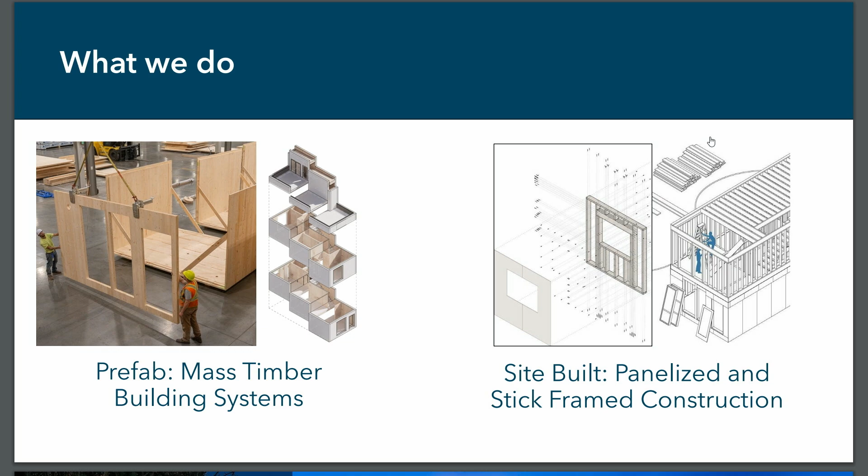We build, like I just said, any way possible. The bulk of our history is in stick frame, on-site construction, but we are doing more and more with either panelized construction or our own building system, which is in mass timber, where we're doing prefabricated mass timber structures. And we know it has to fit your pro forma.

So as we head down towards deep sustainability, carbon negative, net zero, as much as we can get into the pro forma, we know that the more that we systematize and the more that we create prefabrication, the more we're going to be able to do that every single time. When we work with clients, we really work on making sure that the costs are controlled while we hit those sustainability goals.

And here's the fun part and why we're here: mass timber. Does everyone know what mass timber is? Who doesn't? Maybe if you don't know what mass timber is, I can start from the top. Okay, great. You know what? Other people are with you, but everyone's shy. So mass timber is a structural building material.

It is an incredible structural material. It has got a lot of extra rigidity and structural properties. It can be precision engineered and can be cut with a CNC machine. So we're getting tolerances and prefabrication that you don't get in wood.

And if anyone's ever tried to take a 2x material and turn it into some kind of system, you realize really quickly that a 1/4 inch isn't enough tolerance, that there's all this wonk and wobble in every one of those sticks. So how we're really using this in housing is about getting to that precision performance. I'm gonna let other folks talk about larger buildings.

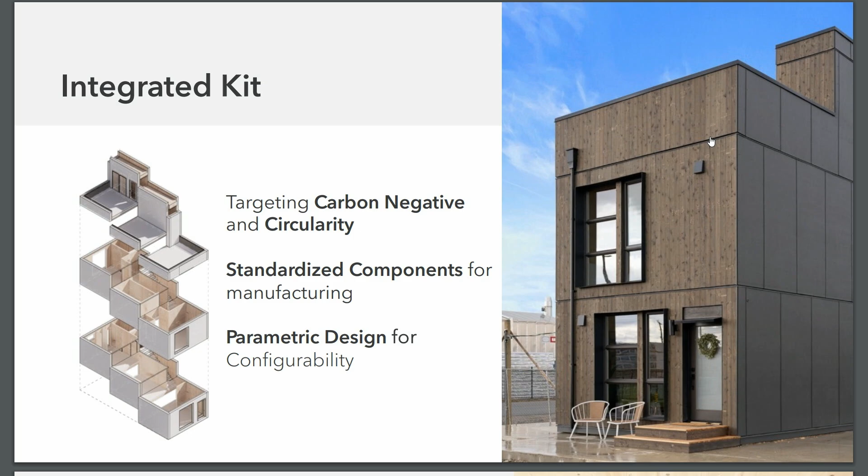Our flagship product was a utility wall, and it still is, and we put it in our integrated kit buildings. You know, we built a lot of houses, and we could go through all the daily logs and tell you that most of the time, something that cost us extra money and rework or time later was in the mechanical, electrical, plumbing zone, and especially rework. The number of times someone drilled through a water line installing a cabinet.

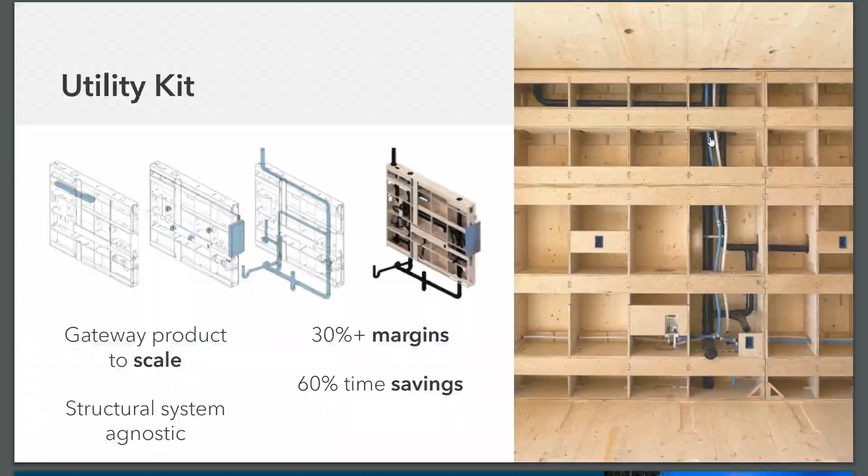And we're not special. My friend just bought a house. It just happened to her. She's like, I can't believe someone drilled through a water line. And I was like, you wouldn't believe how common that is. It's so common. But we can protect for that with systems. We can also save a lot of time on install, optimize for performance, really trying to hack that labor problem on site.

This is kind of fun. There's no prompt ahead of me, so I have to look. I built these slides this morning.

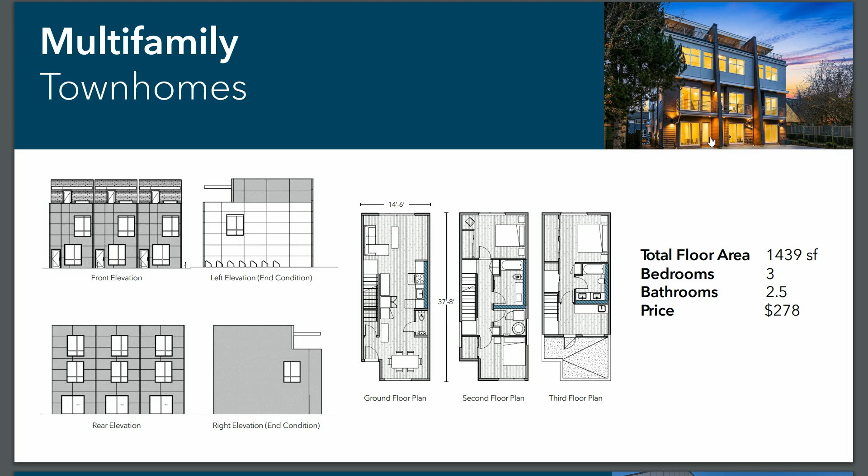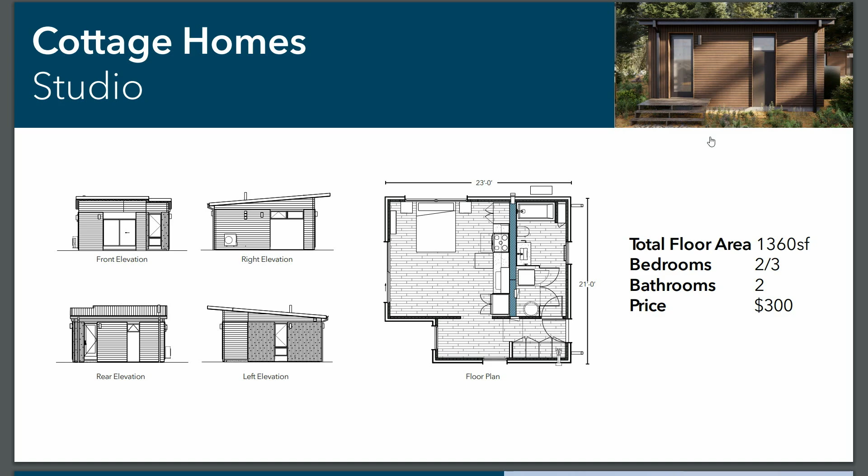So today we're selling our building system kits. These are projects we have examples of on the ground. We've got townhomes, we've got cottages, both two-story units heading to Portland and one-story units heading to Bainbridge Island, Washington, and we're working on an apartment building. So all of these are based on the same component parts, so we can really start to leverage that system.

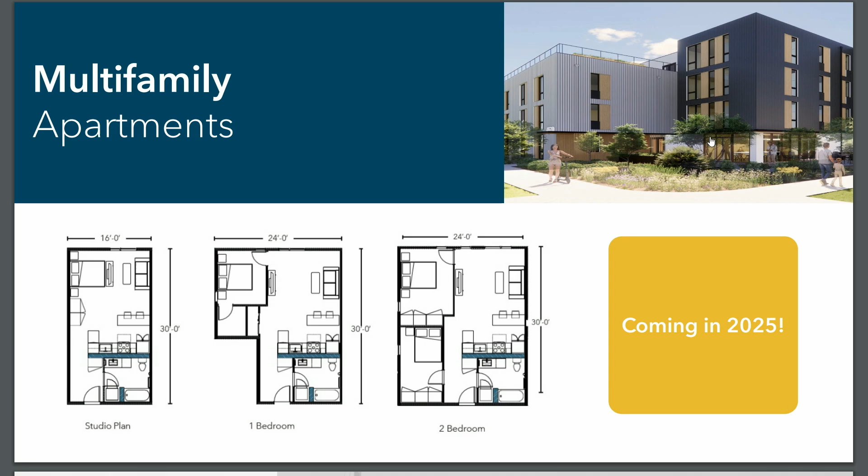So we do prefabrication because it's faster. You guys doing a time check on me? Probably someone should, huh? Okay, cool. So moderate yourselves, we can do it.

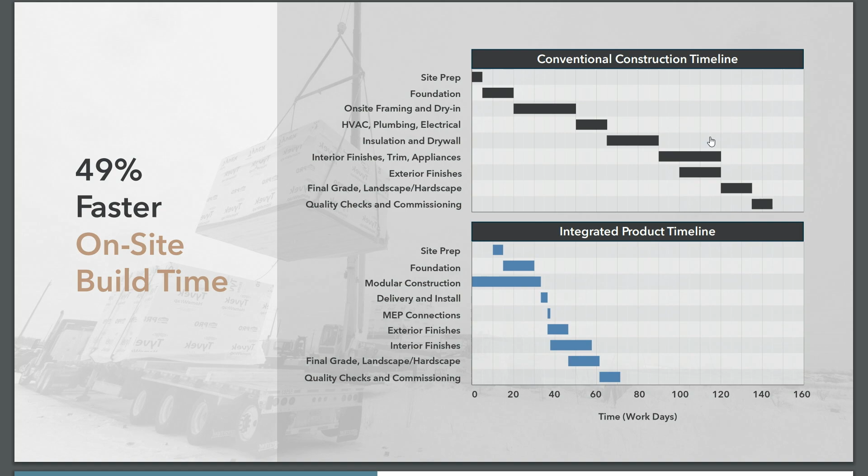We do it because it's faster. Even in these low numbers of prefabrication that we're doing now, 9 here, 7 there, we know we're saving 50% time, and we're not even fully optimized for it. And time, of course, is getting people indoors faster. It's also how fast we get to revenue, whether it's rental revenue or sales revenue, which can really help pro formas out.

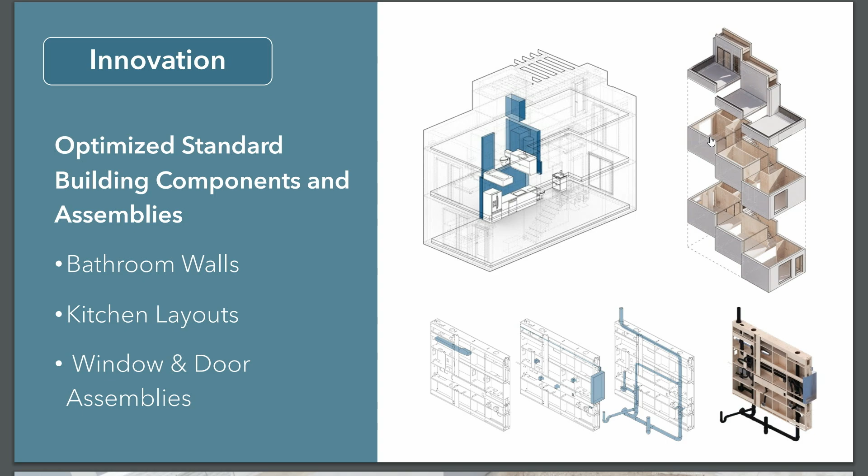All these units are optimized for layout. This is where the rubber meets the road. Everyone's like, this is such a great idea. What do you mean my bathroom needs to be over there? Every single, like, architects, love you, every single time. We have to optimize for the repeatability and then work around the edges where the design can be flexible. And this is how we get to optimized layouts.

3 more slides here. One is we've got DOE grants for advanced research projects, working with other partnerships, trying to get to carbon negative and circular home. So that means not just the building embodied energy and the operational performance is carbon negative, but then those parts and pieces can be used a really long time later. What is the structural value of mass timber in 100 years or even longer? That is an awesome project funded by the Department of Energy.

The second phase of it we're working on now, and we're hoping to get to dispersed delivery systems for off-site manufacturing. Kind of a crazy idea, but how do you go more lightweight while we get units on site? So you can kind of follow us along. That'll be 2025 for us, and we'll let you know how it goes.

And we're not alone in this, but the U.S. Forest Service is really helpful with wood innovation grants and trying to get wood products to be more and more used, especially wood products that can replace steel and concrete, not only for its carbon benefit, but for the national interest of using forests. And we love those wood innovation grants to help us along the way.

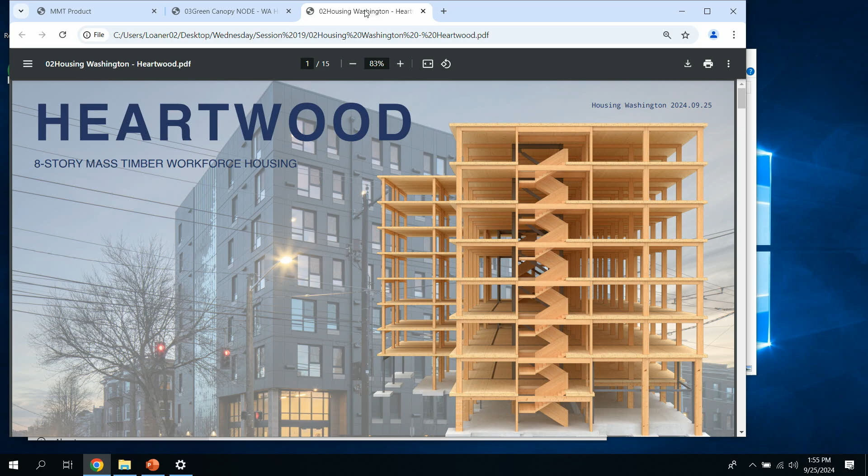All right, I'm also going to make a good effort to try and keep this on time because some of you may have heard about this project before. We've been telling everyone about it at every chance we get. So I'll try not to

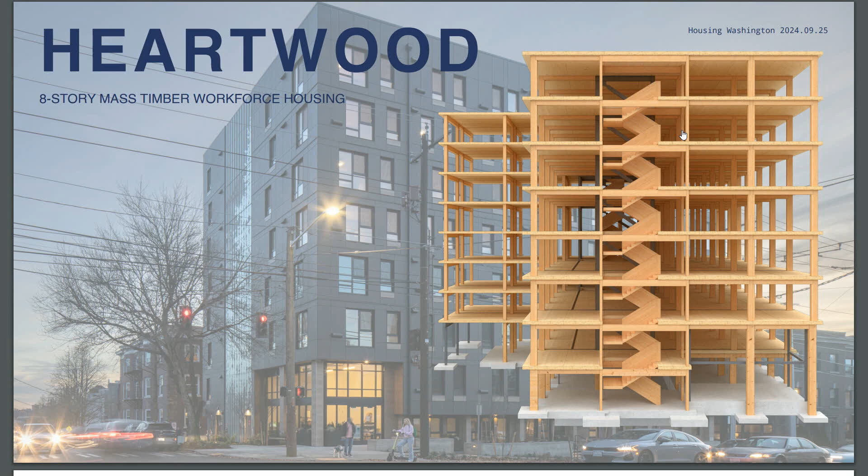repeat too much information. But for those of you that don't know, Heartwood is a workforce housing project in Seattle, right on the boundary of Capitol Hill and Central District. It targets that sort of missing middle income, 60 to 100% AMI. So it's not traditional affordable housing, but also very importantly, it is 8 stories of mass timber, and it is the first as of right permitted in this new Type 4C building code, which I'll explain a little bit more.

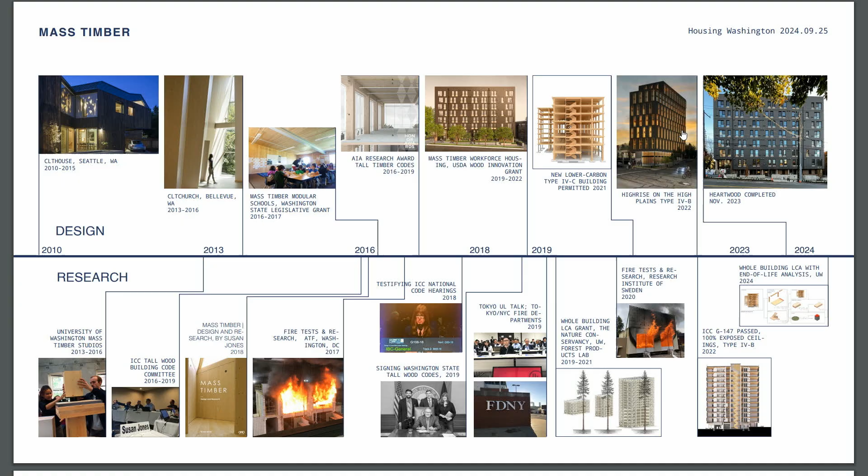Some background on Atelier Jones. I think I didn't do my actual introduction part. I'm Megan Doring. I'm an architect with Atelier Jones. We're based in Seattle, Washington, and we've been involved with mass timber since its earliest stages in the US. So that started with building one of the first CLT houses in the US in 2015, getting involved in the International Code Council's Tall Wood Building Committee to rewrite those codes so that in 2021 we could make tall timber a possibility, and then working further through more fire tests to revise those codes for 2024 to make it even easier and expose more timber in those buildings.

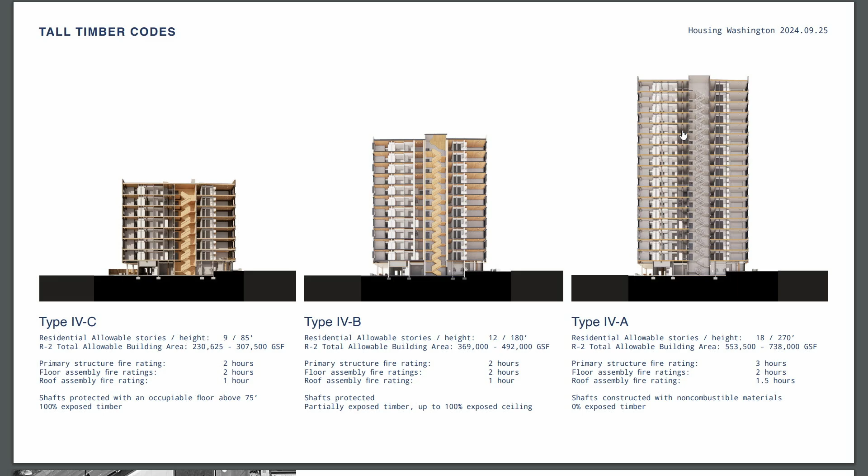So just a high-level summary of what these codes are. We created 3 new building types. Type 4 used to be the heavy timber area, so now that's Type 4 HT, and then we have these 3 new types, which are Type 4C, 4B, and 4A. C being the 9-story, that's your least restrictive. You can expose all your timber, you can look at all of it. Type 4B is that sweet spot in the middle, that 12-story model, where you have to cover up just a little bit of your timber. And then Type 4A, which is up to 18 stories, but you have to cover all your timber with gypsum wallboard.

So how does this apply to Heartwood? So Heartwood is located, like I said, at that boundary of the Capitol Hill and the Central District. It's on a shared site with the existing Helen V apartments, which are an affordable building that's owned and operated by Community Roots Housing, which is a long-standing nonprofit in the Capitol Hill area that you guys might be familiar with.

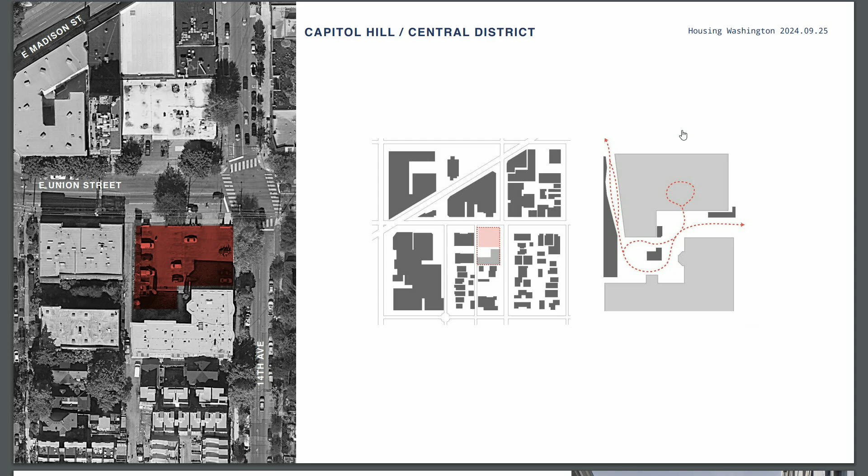And the challenge with this site was building on a site with an already active building that people are living in. We have power lines, we have a sidewalk that has to remain open, and that's a point accessed building, which means we have to keep all of the entrances accessible at all times. And we had, of course, trees and all of those other things. With urban infill, there's all of these difficulties, and we had no laydown area on this site. And that's really what made mass timber an interest to this project, that we could do that just in time delivery and get everything straight from the truck into erection.

So just some background on the building. There was always a focus on this building on balancing and working together with efficiency to get as many housing units in this project as possible, but also it needed to create a community with this existing building. This would end up being a mixed income community between this already affordable building and this new sort of missing middle income workforce housing project.

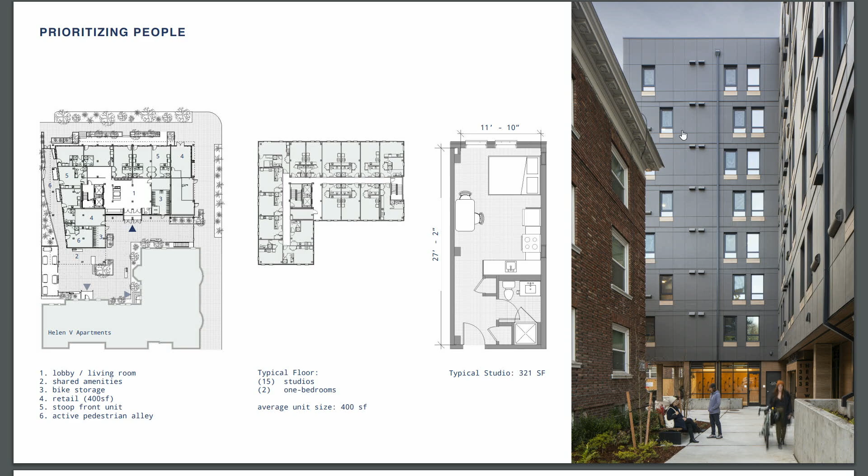So we did that by keeping those upper floors really, really simple and really repeatable. These are studio and 1-bedroom units, so they're very efficient pricing-wise to build. We all know that that's what normally makes projects pencil. But we focused all of our design efforts on that ground floor. So we're carving back spaces to create those shared entries, shared amenities that are serving both buildings, both populations, and this was input from those existing residents that helped shape these spaces. So we're being very intentional with where we're putting our design and where we're being very, very efficient.

But to give you a little backup and explain how this project came to be, Heartwood project received a Wood Innovation Grant in 2019 to support the pre-development phase and the feasibility studies for this project. And what really made it work and made mass timber interesting for this project was the fact that we were able to get those additional 3 stories above what we could otherwise build and up to the maximum allowable in the zoning because we went with mass timber.

There were some sensitive soils on this site, so we couldn't really go in the ground. We needed to keep a really lightweight, shallow foundation, and mass timber allowed us to get that density and that additional height without disturbing those soils. So this is a slab-on-grade foundation with a little bit of mat under the elevators, but otherwise it's very minimal concrete.

And I can give you some high-level summaries on the capital stack for this project. This was not my area of expertise. This was AP Hurd with Skipstone that really did all the wizardry on this. So this is not a publicly funded project, so there's no LIHTC here. It received a conventional loan with 2021 interest rates and had a little bit of private equity, but otherwise is traditionally funded.

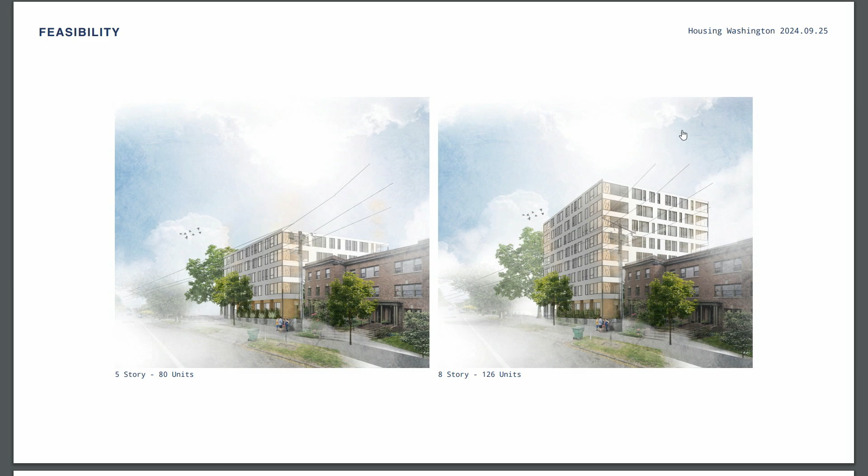But the mass timber itself was smooth and on schedule, and that install went at about a floor every week and a half, and that's including the seismic core that went up at the same time. But working with mass timber, we have to consider certain things in feasibility that you otherwise wouldn't. So you're front-loading some of your design effort.

And an example of that was in this project, we had to study in detail the reflected ceiling plans of the units when we were still in pre-development because of some of the quirks of the tall timber code. Concealed spaces add a lot of cost because you have to treat them a little more specially and line them with non-combustible material. So we considered where we routed every single service and material at the pre-development stage and really figured out where things were going.

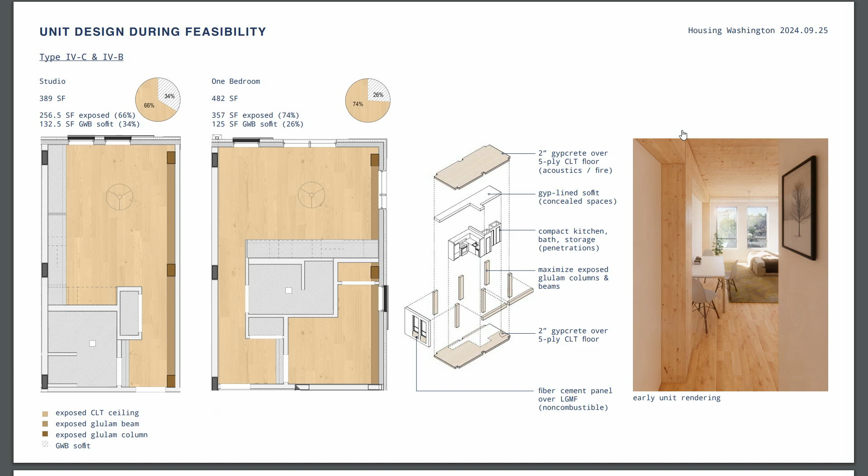And a lot of this comes with when you're establishing this novel new system, you have to front load some of that effort. And prefabrication is certainly a part of that. You're thinking about things earlier on. But this new system is based around this all wood joint. So your structure for these Type 4C buildings needs to be 2-hour rated, and this is a 2-hour rated joint that's all wood with no steel connectors. There's a few screws in there, but you're not doing steel hangers or anything like that.

So that saved us a lot of cost in the steel package. I think it came to like $5 a square foot or something like that, a significant cost in the steel package while maintaining that 2-hour connection, and this is approved by the City of Seattle and works for the Type 4B and the Type 4C buildings.

But the system that this is based off of, this post and beam sort of column loaded system as opposed to a bearing wall, means that we have really flexible grids. We can go from 12 feet to 18 feet really easily, and that means we can adapt to the site really easily. So Heartwood has grids that sort of look like they're all over the place, but it's just so we could squeeze in as many units as possible.

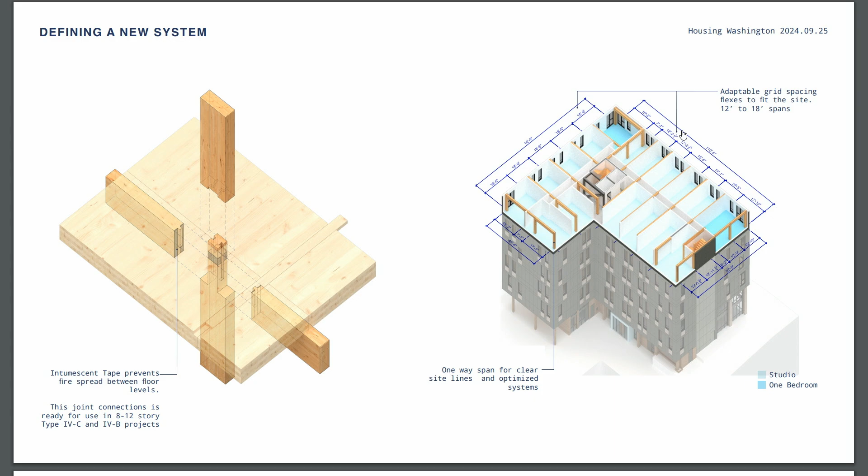But it also means that in the future, none of those walls are bearing. You can take them all down. This can become 3-bedroom condos. It can become whatever it needs to be 100 years from now, because the facade can come off. That's not load bearing either. So the long-term adaptability is thought into this building from the very start.

But for all of that long-term adaptability, we also had to think about a lot of things earlier on when we were trying to get these dense units in here. So we talked to a lot of our consultants and got our entire team on board really early in the process. In the early stages, we were talking obviously to structural, but also fire protection engineers and acoustic engineers, about a lot of these small things that needed to have the code language interpreted through the City of Seattle. So we're not asking for any exceptions, but we needed a lot of things defined for the first time.

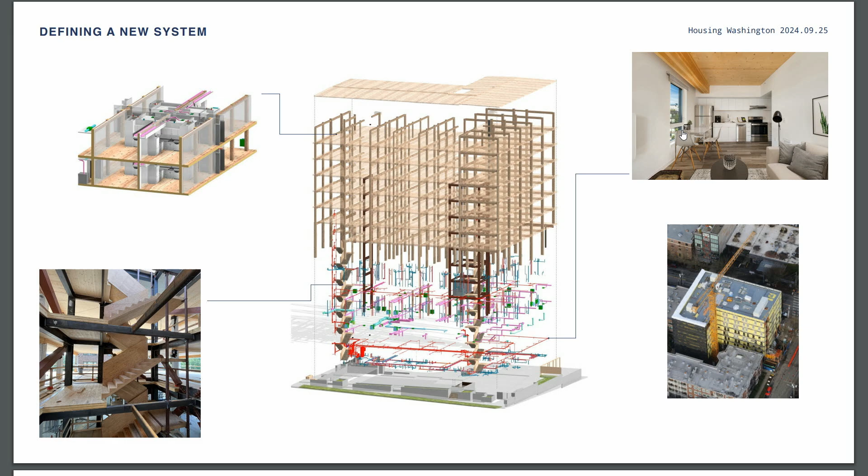That's not to say you don't still want to get those engineers involved early in any mass timber project, because you're prefabricating. We're cutting every hole larger than 4 inches in the factory, so we need to know where every single pipe is going. But that early design and early feedback from our consultants meant we were able to expose more timber in some of these secondary spaces. Our corridors are completely exposed except for a sprinkler line, because we were able to tuck away our services in other areas. We were able to get exposed timber on our egress stairs.

Those are not special feature stairs; those are the regular exit stairs. And using that mass plywood panel meant those stairs went up at the same time and pace as the rest of the building. We didn't need secondary construction access stairs. They helped in so many ways, and they also help the overall effect of the building without adding extra cost. So we're getting all of this warmth and exposed timber just with the efficiency of the structure and the basics of the building.

But with exposing all of that timber, we have to be really cognizant about where we're getting it from. Atelier Jones has always focused on the Cascadia wood basket, where we know our forestry laws are very strong. We trust them. We have relationships with our suppliers. We know the forest they're pulling their wood from because they know it, and we've visited a lot of them. It has the secondary benefit of reducing our transportation cost and transportation carbon as well. You can see everything for this building was sourced within about 500 miles of Seattle.

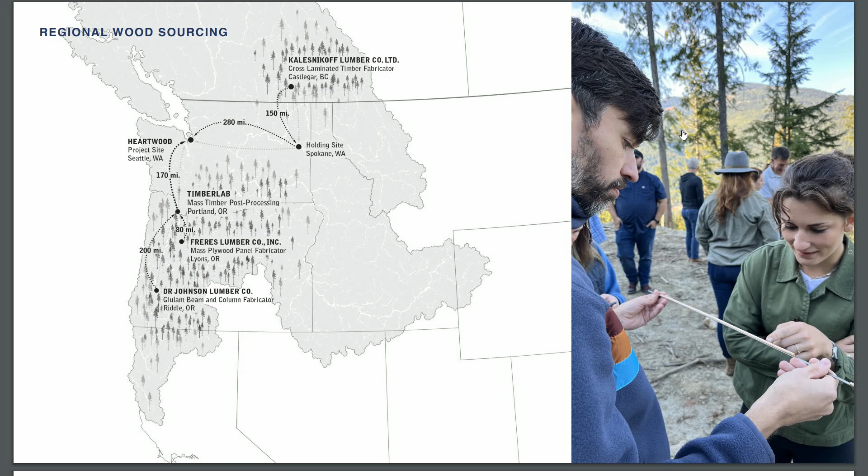But how does that work into the carbon? We completed a life cycle analysis with the University of Washington, where we compared Heartwood to an equivalent 8-story concrete building. That's where we found, and can now confidently say, that the structure of this building is net negative. There's more carbon stored in that timber than is expended to create the concrete and the steel, to transport it to site, and to put it up.

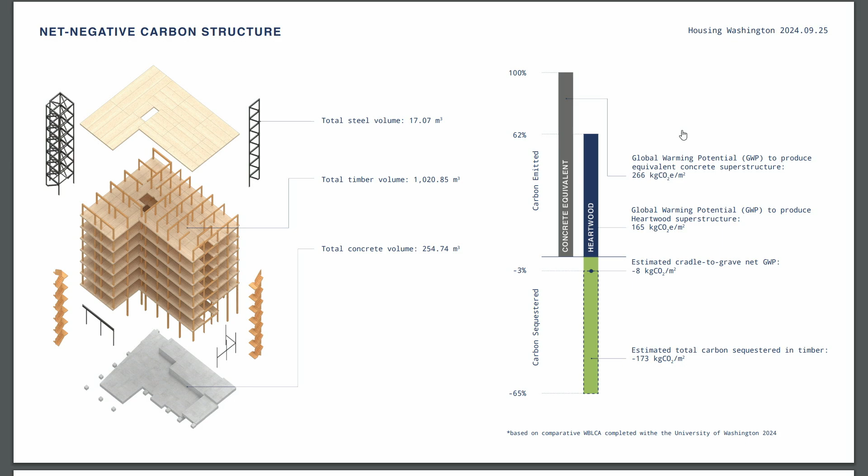But we also took that even further and studied the end of life of this building. If you were to take this building down and reuse the parts to build another building, some of it becomes OSB and particle board, through several cycles of rebuilding, recycling, and creating new products. Even after all of it ends up in a landfill 300 years from now, 88% of that carbon remains stored forever. So we can say we're capturing all of that, and it's helping the overall net negative carbon footprint. We don't have to worry that it's all eventually being released back.

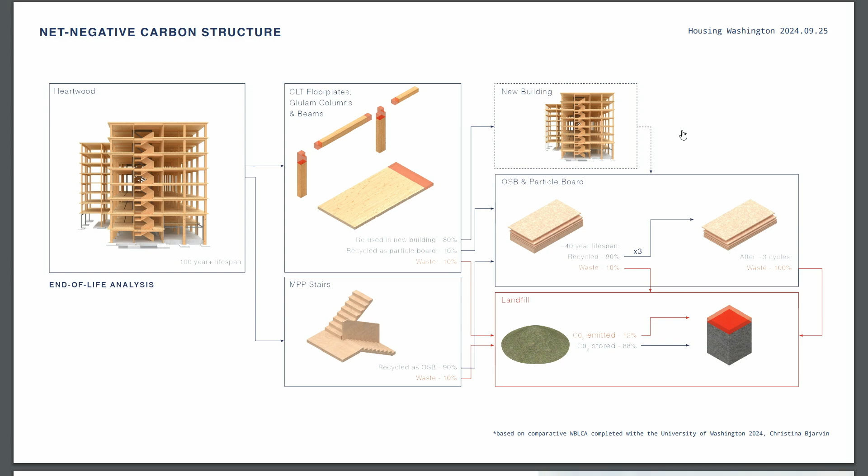And through more recent research, we can also say these are probably conservative assumptions. You're probably getting a longer lifespan than 100 years, and we're probably reusing more of that timber than we assumed in this study. I think we assumed 10% waste every time you reuse that product, and our recent research shows we're getting nearly all of it into reuse because of the way we're doing our joint connections. There aren't steel kerf plates or things we have to take out. It's an all-wood connection, so you can use more of that wood.

So where is this going in the long term? We're currently working on replication, on doing this again at scale. We all know our housing crisis is a scale problem. We need big solutions, for our carbon and climate change issues as well as our housing. So we're working on finding those efficiencies, because this was a first-time, semi-novel system. We want to find how we can standardize and replicate it and make it work, and we're excited to see where that goes. All right, with that, I will pass it off.

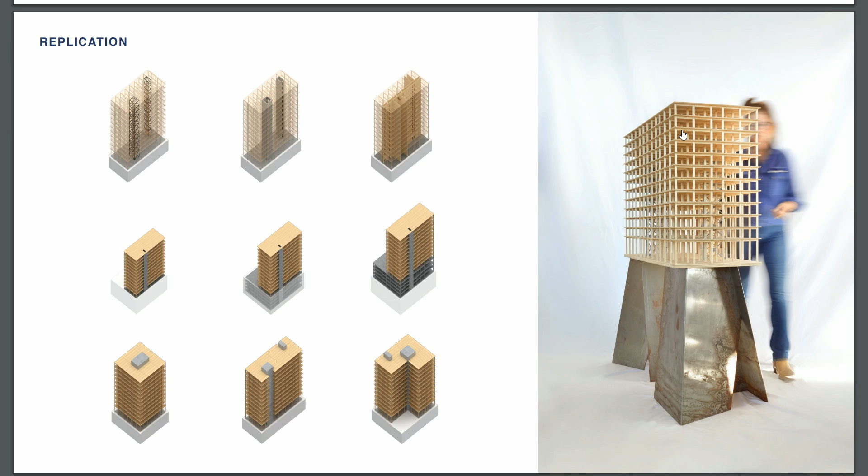I'm Todd Beyreuther. My role at Mercer Mass Timber, which is a factory in the valley here, Spokane Valley, is as the product director. So in that, I'm focused on bringing new products to market, and that's the materials, but also this is a presentation about components and assemblies that help answer the question that we were tasked with here, which was mass timber triple bottom line, is it real? I hope so, otherwise I need a new career. But if not, it's because we're not doing it right.

And in this, what I want to share with you a little bit is more of the industrialist side of it. I come from a design engineering background, but right now we think of mass timber on big projects like Heartwood, where it's a typical design bid build. So we have obviously our project teams that service those things. We have the manufacturing, and then we have the construction that installs and the buildings.

What I want to say in this small little diagram here is the not doing it right part on the housing side. I spent all my time trying to move into the housing industrial markets, which we designed that factory for in Katerra back in 2016. Just a little history on that factory. It makes it a little different than other mass timber factories. It was designed only to make floor plates for Katerra 3-story garden walk-up. So it was a scale problem for housing.

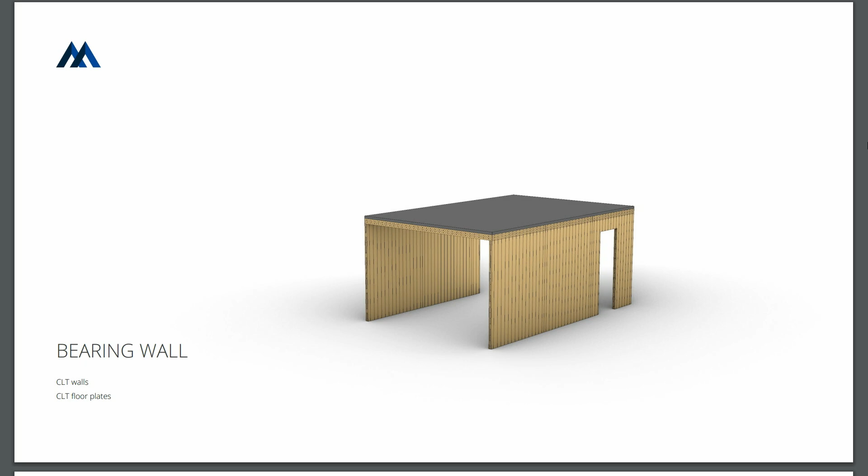Rib panels allow us to get up to 30 or so feet. There's 2-hour fire ratings where we start to see really big members, such as buildings in Milwaukee where you have 3-foot by 3-foot columns. This is where the industry is going. A lot of that's about fire protection, char. And then you see less of this in the U.S., but as we get into residential, with Europeans it's very typical to see load-bearing walls. We don't do this a lot in our area. We're in seismic zones. This is not a real practical solution unless we're creative about this.

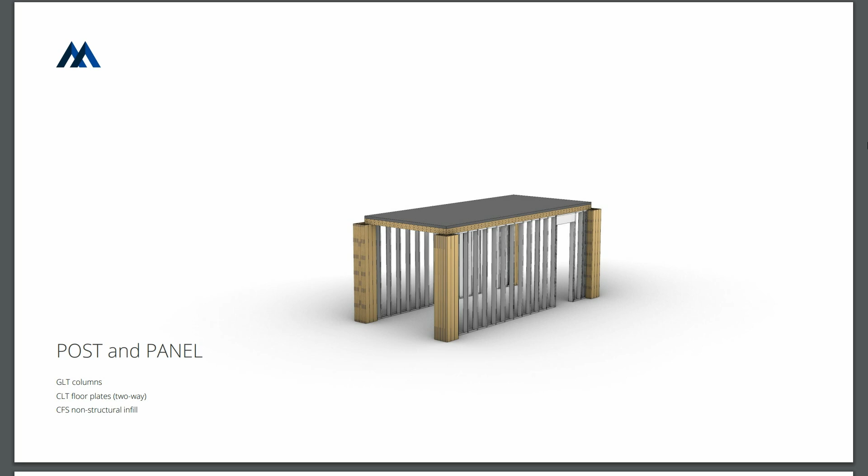But it's important that we talk about the application of housing, the post and beam with cold-formed steel infill, the post and panel like Brock Commons, if you're familiar, up in Vancouver, that was a residential tight grid, non-load-bearing cold-formed steel infill. It had all been encapsulated, but steel hybrids are a big topic right now, and that also can mean load-bearing cold-formed steel. All these are on the table, and all are relevant from 1 to 12, 18 stories.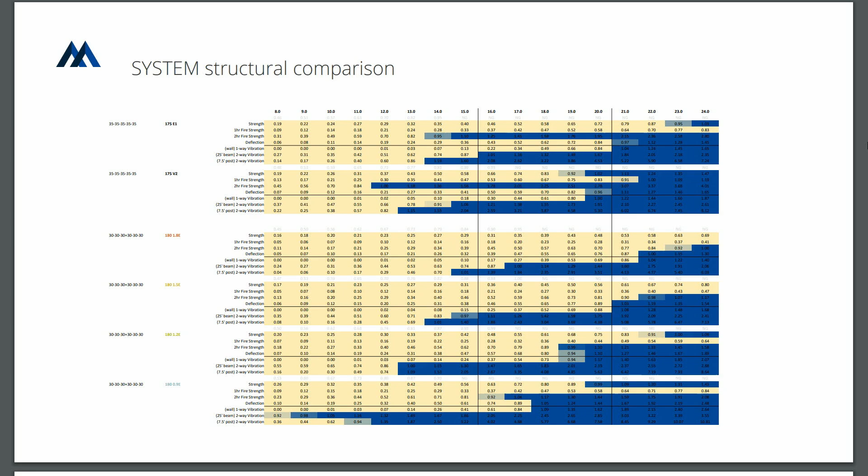Now this diagram here, this is for structural engineers, this is more of the utilization of where we can apply this. When we're looking at all those different systems and the materials we're making, we do all these obviously structural engineering checks. Is it strong enough at service condition, at fire condition, 1 hour, 2 hour fire rate? And what I want to emphasize on the bottom here is those bottom bars. If you dig deep into this, it's about the serviceability, the vibration, the deflection, and so forth. And in those big projects where we have the simple span, now let's get into the product side of it.

We're doing single spans, we're putting a lot of concrete and so forth on it to make sure that we meet all those performance requirements. So it's not about what's the least amount of material we can use. It's not an engineering problem in the sense of what's the most efficient, lightest weight building. It's what's the appropriate amount.

So that starts to get into our Washington story of here are our markets, obviously in the Pacific Northwest. This is how we land these kind of facilities in the Pacific Northwest. The answer is, where do you put one of these? You put it in Longview, Washington, or Spokane is what we came to the conclusion. Obviously, Oregon, along the I-5 corridor, is relevant also. But Spokane was our solution because of the diversity of the different species.

So this presentation isn't about the wildfire side and so forth, but it's all part of the story of how do we utilize those species? How do we tie into our fiber basket here? Reinforce our rural economies while we're doing this and serving all markets across the state and creating those jobs.

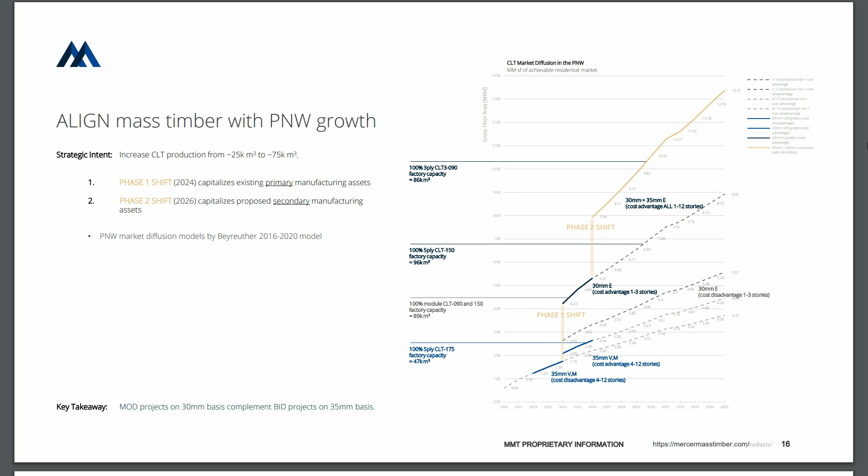And then an important part of the story that I want to emphasize on this is as we look at the market diffusion, those lower blue bars there are the way we're doing it now. So this is the relevancy of how we grow this. Yes, we need to do the big buildings, but when we look at our housing needs, over 90% of that's going to be low-rise construction. How do we fill that gap between low-rise and the mid-rise that was presented earlier? And so it's really about the building systems and how we certify, manufacture, and scale those.

And I'll put real numbers on these. The light blue bars are the way we're doing it now. And that's why they're competitive in the mid-rise, the commercial, so forth, because it's less efficient through a factory like we have out in the valley. We're putting about half of the volume through the batch process that we could, and that works if the market can carry it. Housing can't carry $1,800 a cubic meter. It has to be below $1,200. Therefore, we have to design the processes and the buildings differently than we do the big buildings.

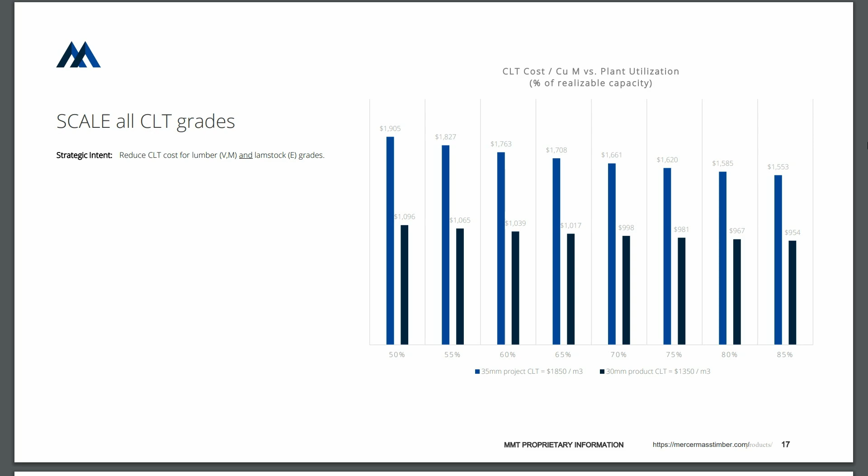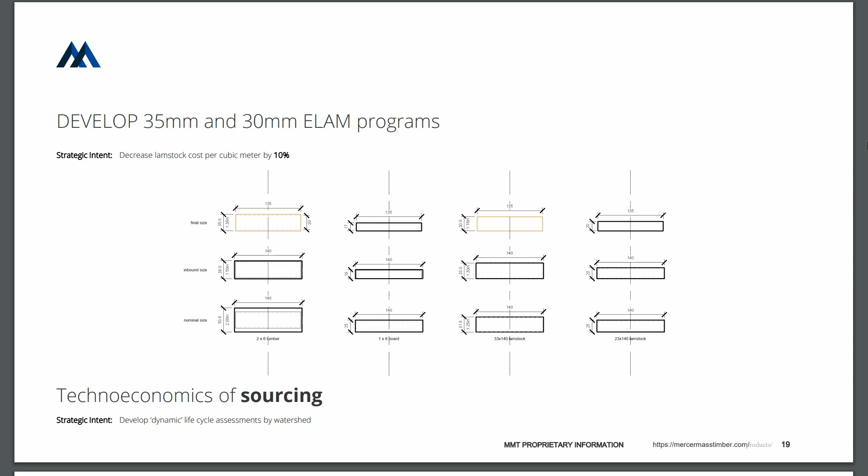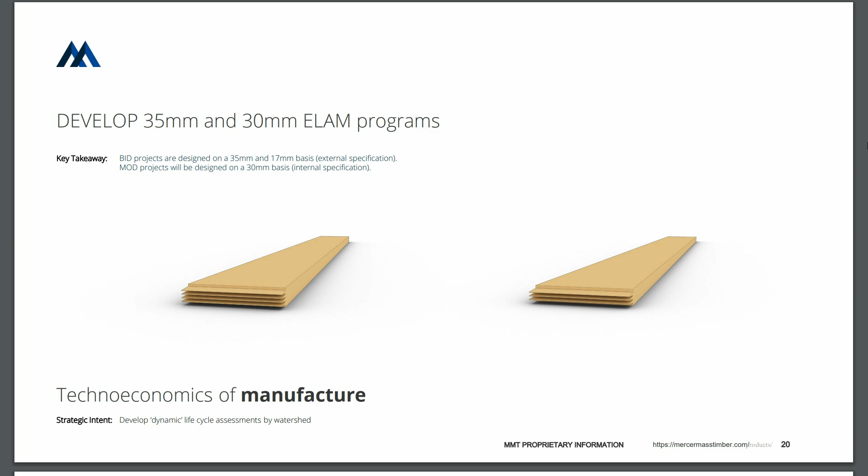So I'm going to go very quickly through this, but as we look at our fiber shed, it's also about utilization. Beck, I agree and disagree with the slapping 2x4s together. That's how we do it now. That's not how we're going to do it in the near future. But my point there is that it's that integrated. We look at what the opportunities are. Just bidding factories against each other is only going to save you a couple percentage points. To dig deep, you have to go all the way up the supply chain and look at the efficiencies of our fiber, how we grade them, the technical side of that.

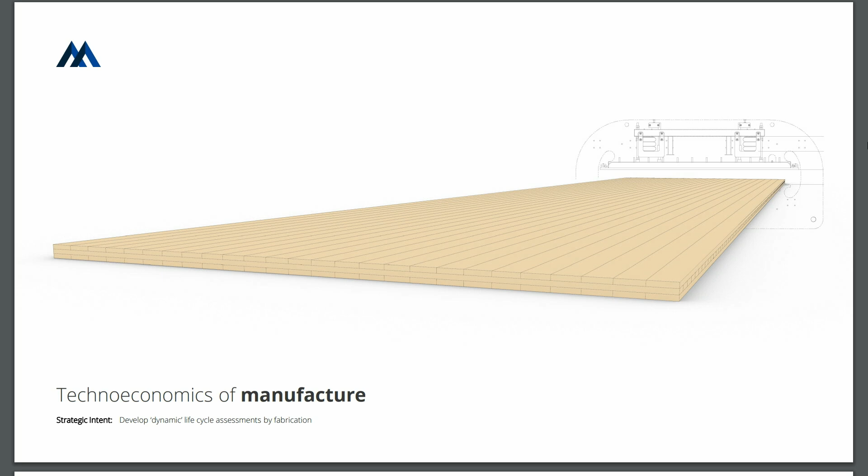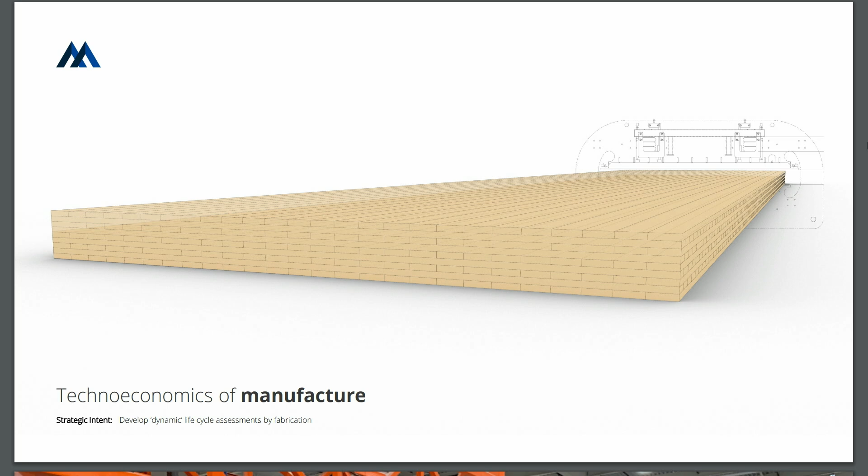Most importantly is this one. If these factories make one panel at a time, that's that $1,800 a cubic meter. If we can start to make thicker members, and more importantly, make multiple panels at a time, and then have higher design efficiency, that's where we realize the big savings. And I challenge anyone in a mature product. The reason I get excited about my job is I can't think of another product, steel, lumber, so forth, where you could pull out almost 50% of the cost just by being a better designer, architect, engineer, and then importantly, the process engineering.

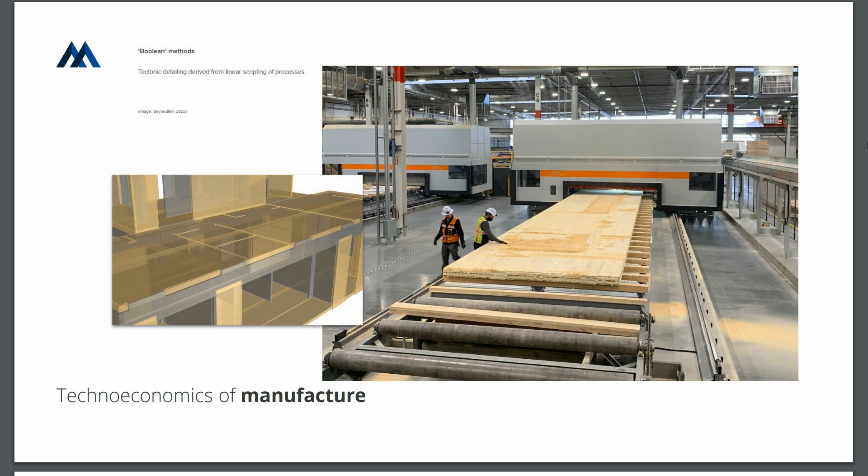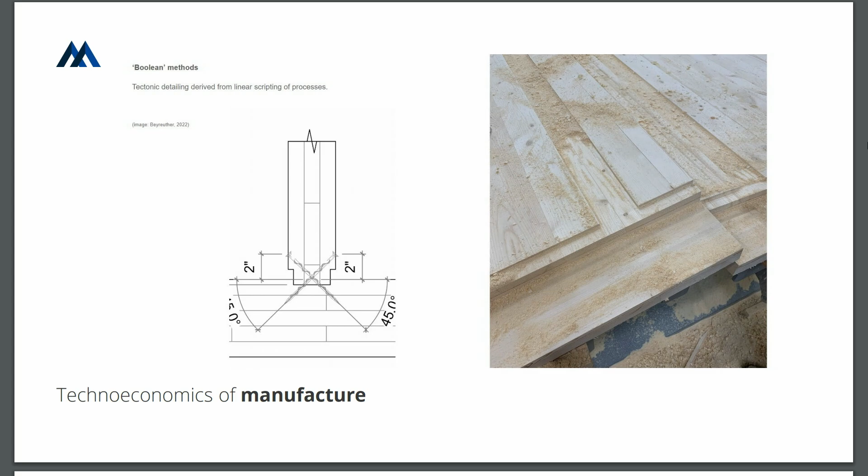So this is what a panel looks like, this is a 5-ply. That's the additive piece. Quickly get into the fun part in the design, the subtractive piece. When I say efficiency on the panel, it doesn't mean you have to take a 12-foot by 60-foot panel that we make and divide it up perfectly, or a 10-foot by 48 panel that somebody else makes. We need to use the CNC machines to make our processes faster. If it means we're getting rid of measuring on site, we're making grooves so that we land floor or sill plates, so forth, in the material. Let's take that time and do that, because that's the automation piece.

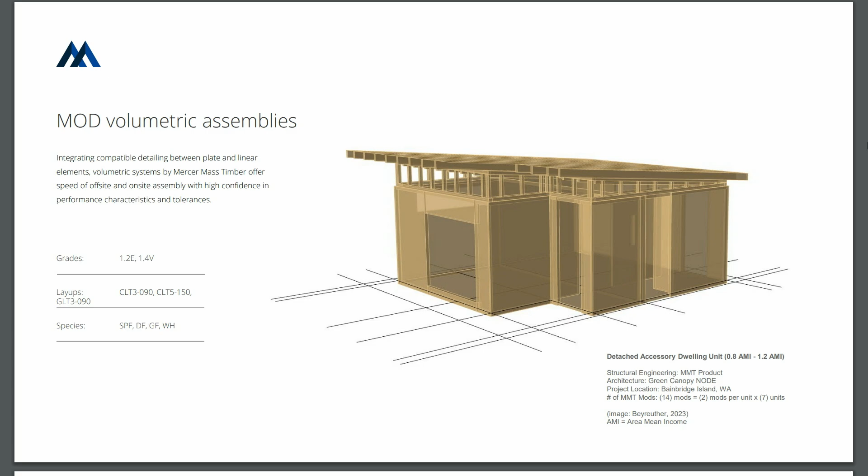And we can make buildings like this that aren't cost effective. They might be more relevant for high-end single family, but we can do ADUs, we can do townhomes, and then we obviously can now start to build into cottages and other multifamily flats and so forth. But what I want to really quickly share, and we're doing that, and Beck and company have been great partners.

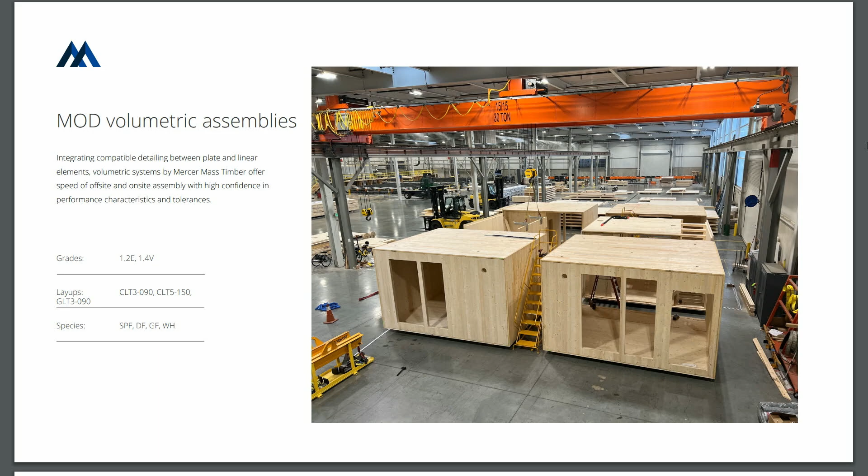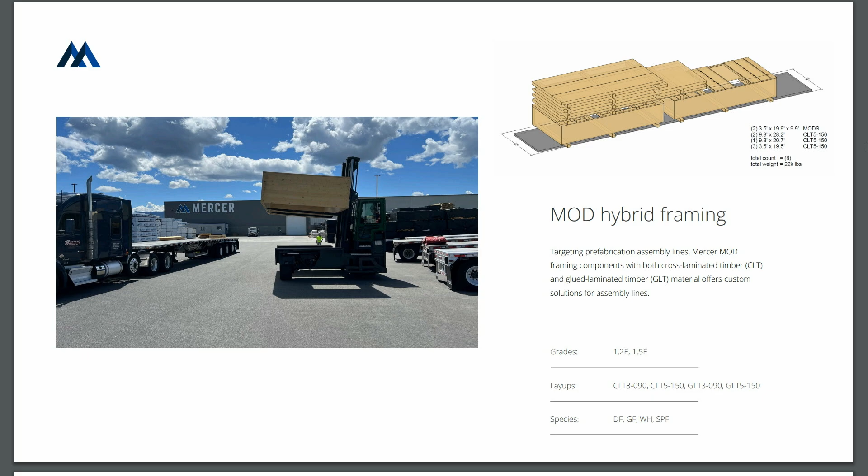If you come see the prototype at the factory, this is it. This is our first time in our factory doing assembly level that we want other partners to, we need 10 of those factories across the state to keep up with the scale of these CLT factories. So, of course, we can supply everything from this factory, but more importantly, can we start to make systems that also flat pack out the components to other factories?

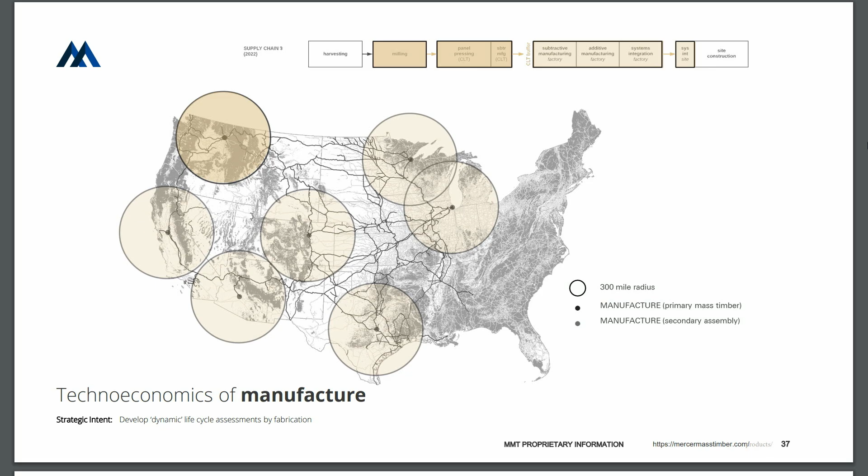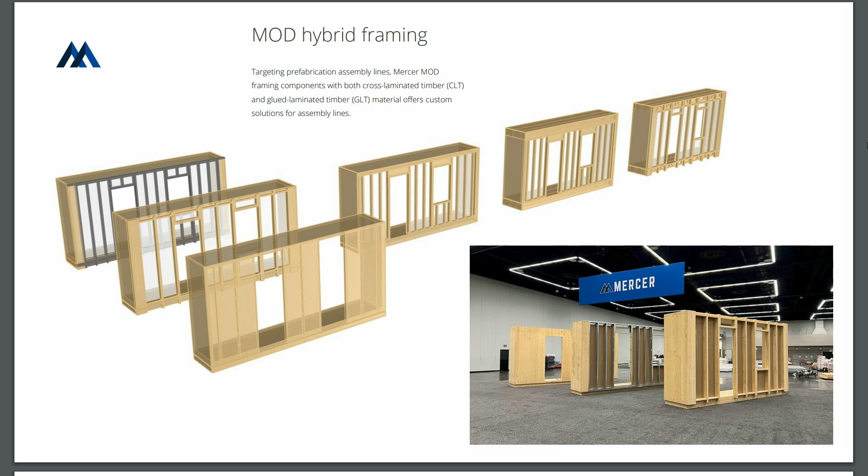Now, this would show across the entire U.S. Let's do 10 of these across Washington, Everett, Tri-Cities, so forth, and get closer to the markets. To do that, we have to come up with new systems that start to utilize those panels better. So the takeaway from this is you don't have to do solid mass timber across 60 by 12-foot panels. You can make lots of components. And as we're getting certification on the different types of systems, we can use the CLT for studs, for posts, for floor plates, so forth.

This is new to the market. I should have recognized this is Forest Service research right now, but this is what we're bringing to market, and we want to work with lots of partners. And I often get the question, well, I can stick frame that for cheaper and so forth. Please do. More of it. We're not anywhere near, obviously, the 60,000 homes we need a year in Washington per the Lieutenant Governor's report. So if you can do that, please do. But we're trying to find other ways we can scale. The factory out there, as one example, can do 5,000 homes of components if we have people that can assemble them quickly enough, new labor forces, so forth.

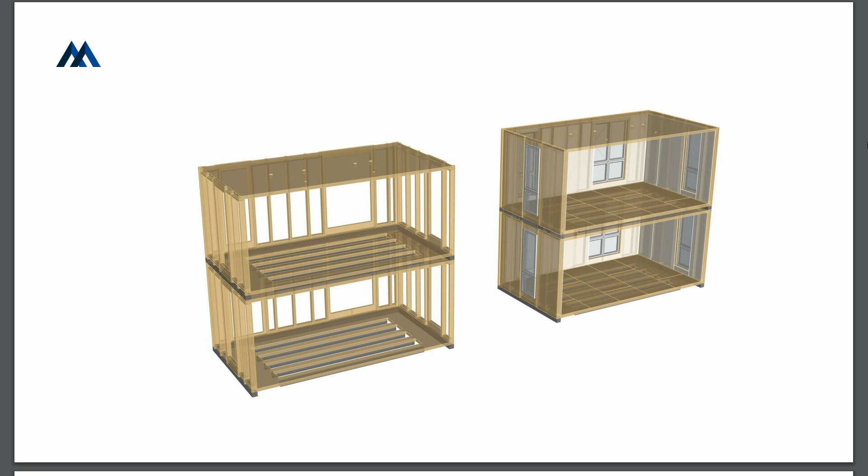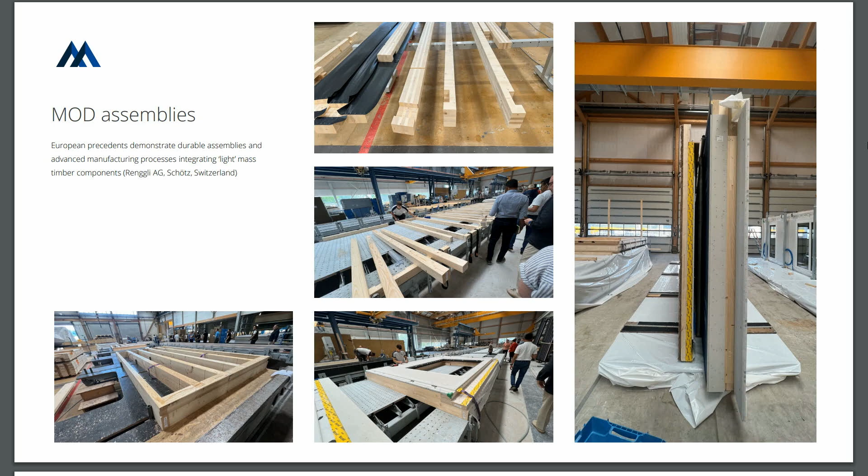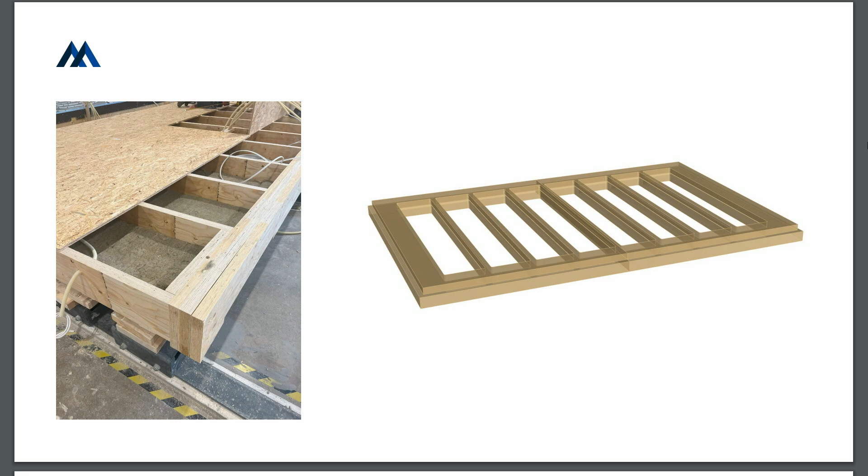So this is what it looks like. This is just some images of the testing and prototyping we're doing down at Washington State University. These are pictures from Europe. We're not making this up. This is done where performance-based design is used for energy, for structure. This is a picture from Finland. The last ones were from Switzerland. We think there are other ways we can start to use this now. There's 4 components on the right replacing 50 components on the left. We're not replacing labor. It's an and. We're doing different types of creative class labor.

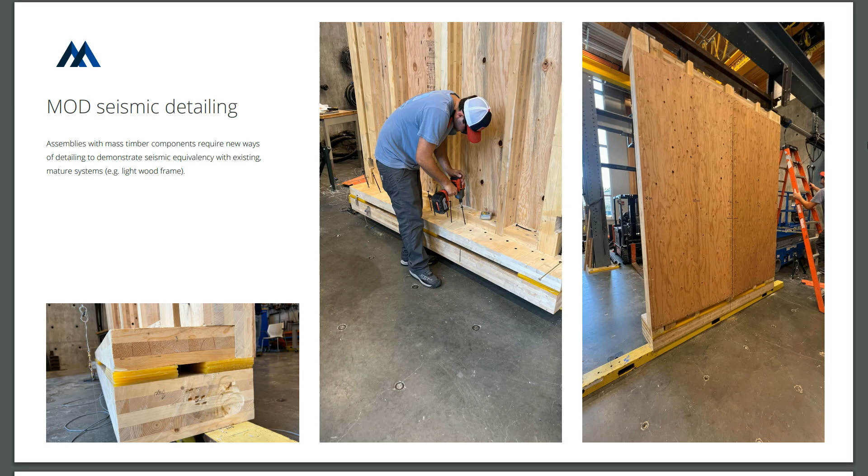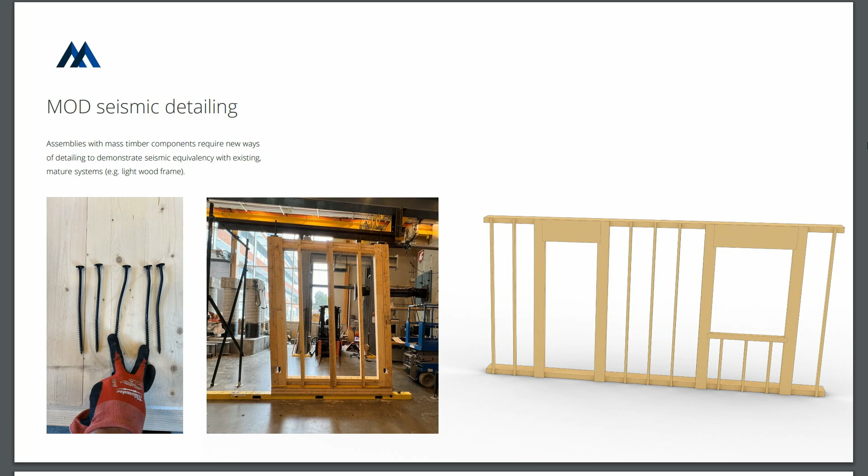This is what these details can look like in the lab. It looks different, but what we're doing is showing equivalency to what we already know in terms of stick framing. That's why we use plywood, rocking walls, and so forth. It's a fun space, but you have to prove everything, all the way down to how the screws behave. And we have the resources in the state. That's why this factory is in Spokane, so we can be near WSU. But we also have the resources in Seattle. I'm a Husky, and we have the designers, the engineers, the industrialists that know how to make things the size of a building and fly them through the air.

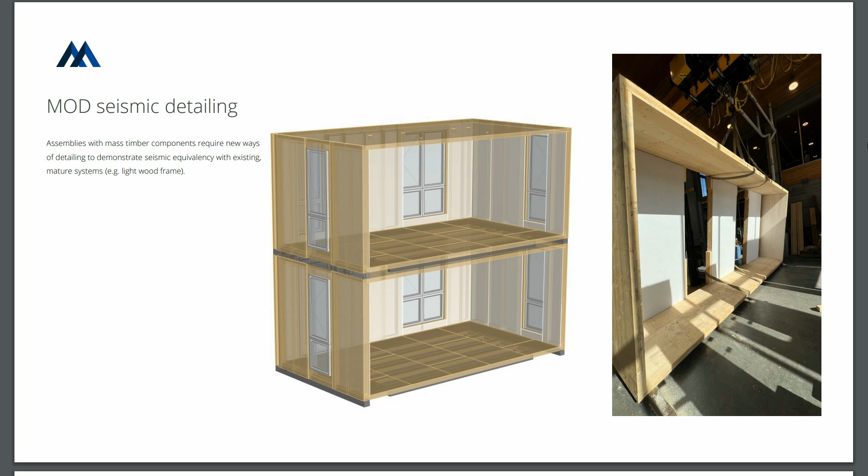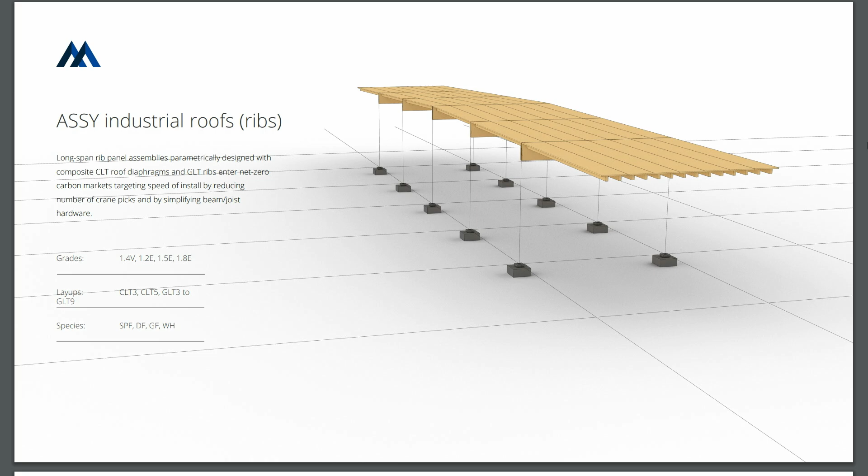So in that confidence, you can see the result of our proposal with our partners on a housing relevant system. I'll conclude by saying, to address the housing crisis, we need to address industrial. In our space, it's also how do we make these factories, distribution centers, data centers that not only allow us to scale the product, share the costs and drive down housing, but also allow us to make these buildings. So, okay, thank you.

Thank you so much for that great presentation. There's a question in the app, and please use your app if you have questions, or we can take questions up here. On the Heartwood model, if the project had less density, other unit types, 1 bedroom, 2 bedrooms versus studios, or was shorter, would the cost efficiencies and carbon savings be comparable, or what would some of the trade-offs be?

I can only answer this very generally because I was not super involved in the pro forma financing side of this, but because this was a traditionally financed project that was financed as if it's market rate, it relied on that density of units to make it work. So we needed those studios and 1 bedrooms and that level of density.

That's not to say you can't make larger scale units work with this same system of mass timber. We've been doing a lot of studies on that, and I can confidently say it does work. And we've been studying it for affordable housing specifically. So it's possible. We just keep getting stuck in the pipeline, as I think everyone else does.